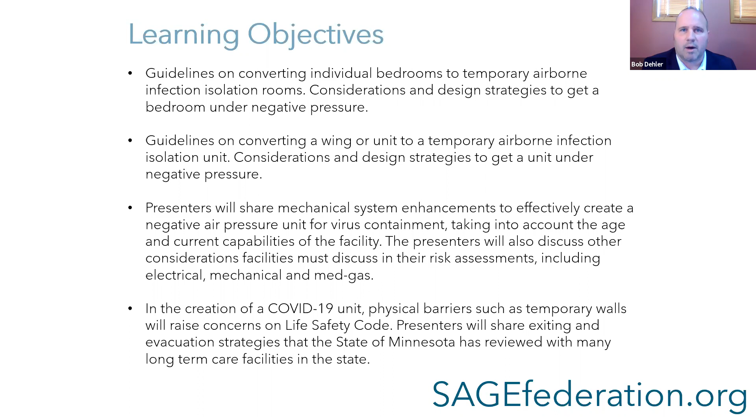And then the last thing we'll talk about is creating a wall to make a temporary unit. A lot of times we want to use existing walls and doors, but many times that doesn't work out as well. And so there are walls that are built to create those units. We'll dive into that a little bit and talk about some of the pitfalls and some of the things to think about when you're doing that.

So first off, I guess what I'll say is that everything I'm telling you today is for the state of Minnesota. It's what we've done. To be honest with you, when all this started, I tried to go to other states to figure out what they've done so I could borrow what they've done. And I had a hard time finding some documentation. So after we had a few conversations with facilities, we documented those conversations and some of the things we talked about. And really that's what we're going to be talking about today.

So please, if you are from another state other than Minnesota, find the Bob in your state and make sure you're in communication with that person. But not only that, there are so many authorities having jurisdiction that you have to work with. Remember to include them all, the health department, but in particular your fire marshal. Sometimes it's a state, sometimes it's local. There's building code officials. Sometimes you have to bring your insurance in when you start talking life safety code and other requirements. You just want to make sure you have all the right people, you're communicating with all the right people. And again, we're going to be talking a lot about risk assessments.

What we're talking about today is all individual. So you need to really assemble a really strong team to go through these risk assessments. The teams would include your infection preventionist, your facilities personnel, clinical, the nurses, leadership, and for sure your engineers.

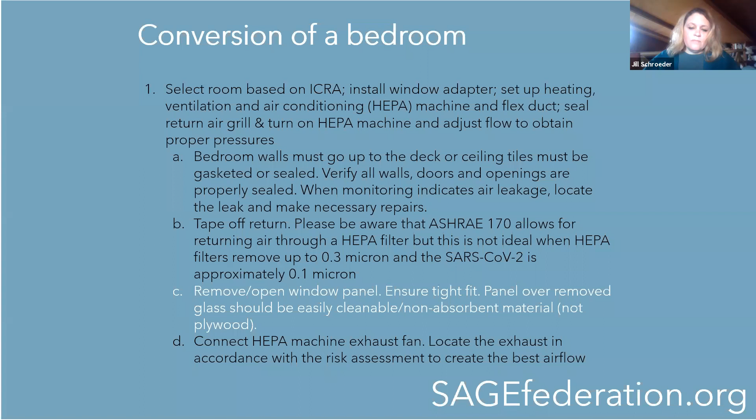So first off, you want to take out the window to the bedroom and put in a panel, making sure you get a nice tight fit. But make sure the panel you put in is not plywood. Everybody wants to use plywood, but not plywood. First off, if your state or local fire marshal sees plywood in the room, they will probably get a little bit excited, so combustibility wise, it's not the best idea. Also, cleanability-wise, your infection preventionists will say plywood is not a good idea.

So don't use plywood. If you're looking for something, you can talk with your glass supplier—they generally have panels made of metal, little sandwich panels that you could use.

Connect your HEPA machine to your exhaust fan and make sure you locate the exhaust in accordance with your risk assessment for the best airflow.

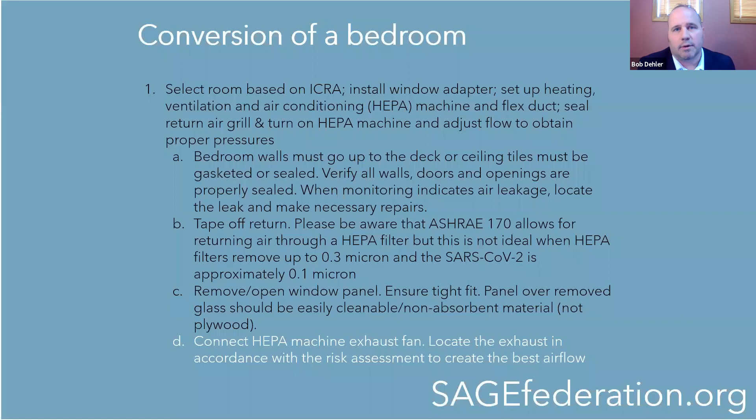We also recommend that you plug in your HEPA machine to emergency power, so if the power does go out and something else bad happens, you really need that pressure maintained in that room—it's super important. We also recommend that you maintain the pressure in the room to at least 0.01 inches water gauge in relation to the air pressure in the corridor. Again, we pulled this from the AII room requirement. It's not very much, but it's very, very important to maintain that negative pressure.

You want to monitor those air pressures periodically to make sure that you're maintaining that air pressure. You can do this with audible electric devices, manometers, or smoke tubes. You can do a lot of different things, but make sure you're doing that in accordance with your facility plan or your emergency plan. Sometimes people want to know how many times they have to do it - well, what does your emergency plan say? Does it say you have to do it every day before people go in and out? So just make sure you stick with your plan on the time frame.

We also say consider maximizing the exhaust fan in the toilet room. If you can get a few more CFM out of the toilet room, see if you have some variable drives on there where you can turn that up. And if your exhaust is not dedicated, as part of your risk assessments, you should look to see if you need to do anything else.

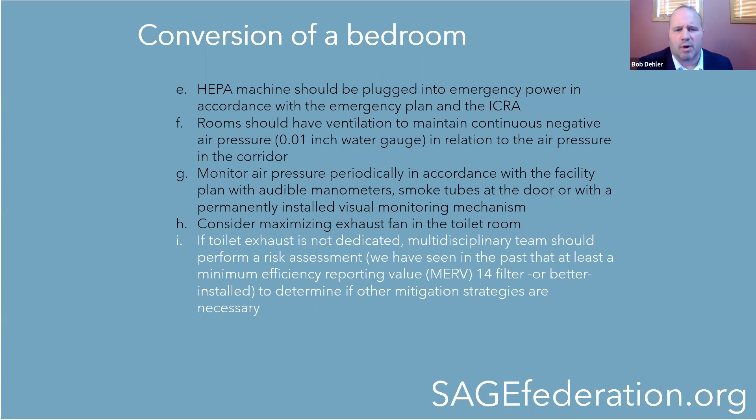We've had a number of facilities decide that they wanted to put a MERV 14 filter. I'm not even sure exactly how they attached it, but I had a feeling they were just somehow attaching it to the ceiling in the toilet room. They wanted that extra level of protection. So if your infection preventionist says, I don't know if I want this air being exhausted, because you never know what'll happen with the system if it goes directly out, or maybe if something gets short circuited, it could pull somewhere else. So a lot of facilities we've talked with have been putting some sort of MERV 14 or better at the exhaust.

Now you've got the HEPA machine sitting in the room and the exhaust going out the window. You want to make sure that exhaust terminal in that window is at least 10 feet away from anything - air intakes, operable windows, sidewalks, patios, anything accessible to anybody. Even though it is filtered through the HEPA machine, you want to be careful and have that clear at least 10 feet.

The door to the room - again, it's super important that these rooms stay under negative pressure, so maintaining that pressure is very important. Keeping that door closed is one of the main ways that you do that. So we would say consider installing a closer. Many facilities aren't doing that right now, but they do have it spelled out in their policies and procedures that the door is always closed at all times, so that pressure is maintained.

And if you don't have a pressure monitoring device, we're recommending that you install something - whether it's a smoke test, air strips, or an actual electronic manometer that'll monitor it constantly.

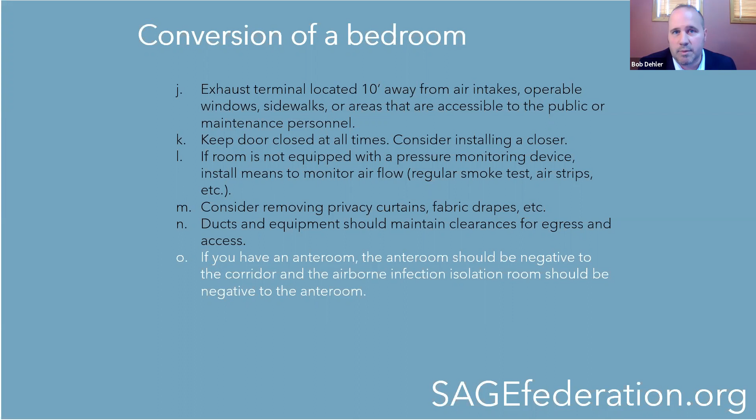And last but not least, for the conversion of a bedroom, if you have an anteroom, some places are thinking about putting in anterooms. There are many ways you can do this. This is why you hire a really smart engineer like Scott to help you out. But if you do want to have an anteroom, we'd recommend the anteroom be negative to the corridor, but the patient room would be negative to the anteroom. So the most negative would be the patient room, the next negative would be the anteroom, and then you would have the corridor.

So the next question we always get is, okay, once we get three rooms like that, it might just be easier to convert a wing or a unit into COVID. And once you start installing all these HEPA machines, if you can find them now, it might be easier to consider a wing. So if you are considering a wing, make sure you're running your infection control risk assessment, and all the other risk assessments that are necessary. Really the same ideas we discussed on the individual rooms apply to the unit.

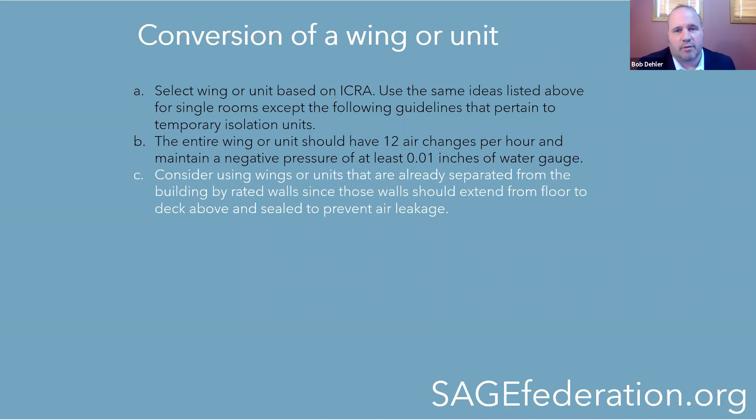So again, 12 air changes an hour and maintaining a negative pressure of 0.01 inches water gauge. The most important thing with the air pressures is a lot of times people will talk with me about, well, we can't get 12 air changes, but what do we really have to do? Again, the 12 air changes and the pressure were recommendations pulled from ASHRAE 170 for airborne infection isolation rooms. So to me, the most important thing is that you're maintaining that negative pressure. If you can only get 10 air changes or 8 air changes, but you can maintain that negative pressure, to me, that's the most important thing.

So if that's the case, then it would just show up on your risk assessments that yes, you may not be making the 12 air changes, but taking into consideration what your infection preventionist says, and if people in your facility believe you're okay with something that doesn't quite meet our guidelines, to me this is a facility decision and facility mitigation.

So you should check all the walls around the whole unit. So in the bedroom, when we used the one bedroom, we checked all those walls to make sure they went up to deck. You're going to want to do the same thing for this whole unit. Having these walls go up to deck is really of utmost importance. Without that, you're going to have an almost impossible time maintaining that negative pressure. So make sure the first thing you do when converting a wing or unit is to make sure those walls go to deck, and seal all those penetrations as well.

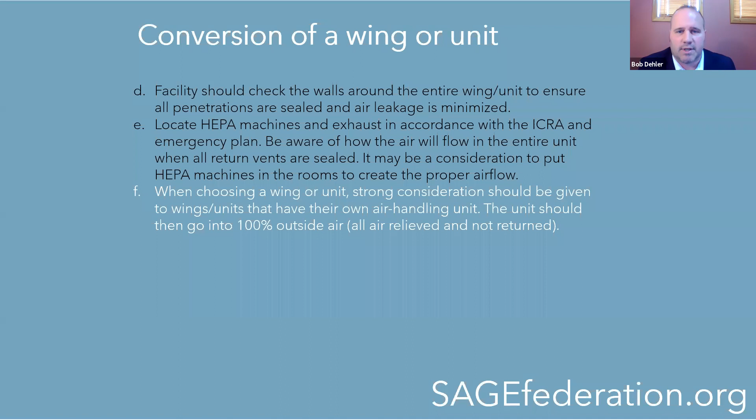You want to think about where you want to put these HEPA machines. I've seen some facilities just keep them at the end of their quote unquote corridor at the end of the unit and exhaust them out there. Sometimes they'll use a few rooms at the end, but basically they're putting a negative pressure in the entire unit. So again, make sure that goes through your risk assessments and you really understand how that air flows.

I should add here, Bob, that we did not state at the beginning, and we should have, that COVID-19, they're still learning a lot about this virus, but we're treating these guidelines as a blanket guideline for an infectious airborne disease unit. We know that right now, as of today, COVID-19 is not identified as an airborne infectious disease, but we're treating it as if it were because we don't know enough about it.

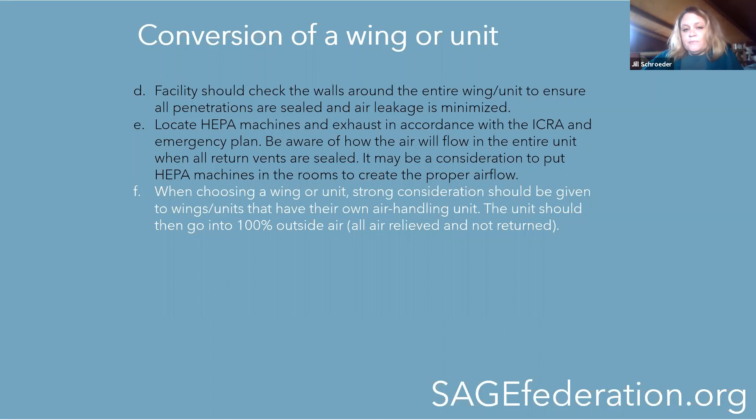Yes, the CDC does not recommend having the negative pressure like we are today, but people have also gotten COVID-19 15 to 20 feet away from other folks. So there's people on both sides of the aisle. We're taking the more conservative route. Right.

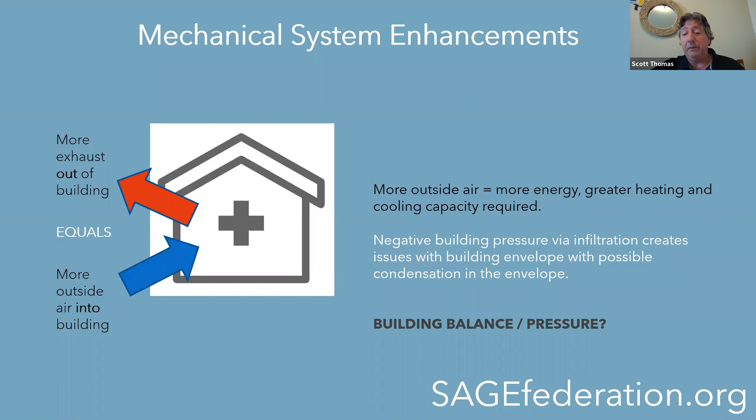With our mechanical systems, once you start taking all this exhaust air out of the building, it means we're going to need to introduce more outside air into the building, which means more energy, greater heating and cooling capacities required potentially. If you have a negative building, if you don't address the increased outside air being introduced through an air handling type system—assuming you go with a wing, or if you have numerous rooms—it could create a negative building pressure, creating infiltration issues and potentially condensation issues in the envelope. So that's the biggest thing to look at.

We put a list together here for assessment considerations for MEP systems. This applies to both the entire wing or just individual rooms.

Are you planning for this to be a temporary or permanent fix? Obviously it's probably very urgent to get this done, so maybe you start with a temporary solution with a plan to develop a permanent resolution.

With these exhaust units, the HEPA units, with AII type rooms, if you're trying to use existing systems, it'll increase the static pressure of the systems due to the increased filtration static pressure drops. So that needs to be considered with entire systems in a wing type application.

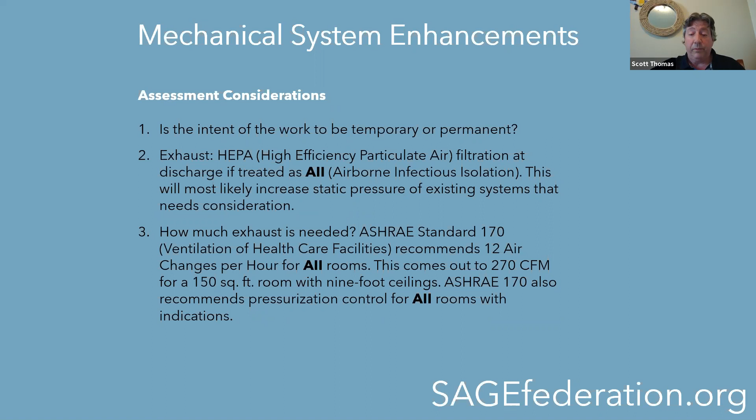As Bob talked about, 12 air changes per hour is recommended for AII rooms. For an individual room, assuming 150 square feet with 9-foot ceilings, that comes out to 270 CFM, which isn't really that bad as far as a window unit. I think the smallest units start out about 500 CFM, which are real common. We'll show a picture of a typical unit later on.

So say you're doing a wing and you have a DOAS unit, a dedicated outside air system. It's either a heat wheel type unit or a plate and frame type system. With heat wheel units, there is cross contamination, so you're going to need to divert that exhaust air in some way, possibly adding an exhaust fan to separate it out.

As Bob said, if you have a dedicated system, you can't just take 3 rooms and tie it into the bigger system. You need to look at what this unit serves—does it just serve the wing, or more than the wing? If it serves more, you need to separate that out. Plate and frame type heat exchangers shouldn't have cross contamination issues, but check with the manufacturer, get test data, make sure you won't have issues down the road.

So talking about the wings, Bob mentioned removing a window. Well, you put a mobile air cleaner, a MAC, in the room. Maybe it's easier to go out the wall—you can just run a round or flex duct through the wall, and if you have stud wall construction, that's probably simpler, works easier, and is less costly with less overall impact.

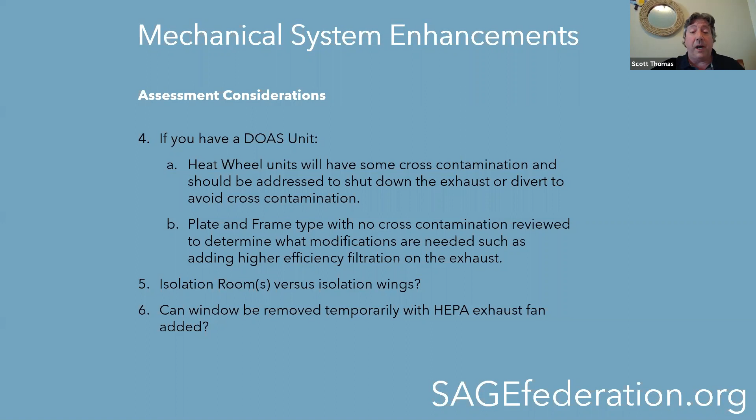What's your building balance, and how does that affect your heating capacity? Normally the FGI guidelines and state of Minnesota code require redundant heating capacity, so you're probably going to be okay with the heating aspects. In this type of situation, you need to tap into that spare boiler—commonly we'll design systems with 3 boilers total with 1 standby unit, so you've got quite a bit of capacity there.

Cooling—well, if it's a northern climate, it may not be that big of an issue. With the elderly you have to be careful, but it's not like you'll be without cooling completely. Obviously cooling capacity is a lot more critical in your southern climates.

Bob also mentioned emergency power capability—ASHRAE and FGI both recommend AII rooms be on emergency power, so it's almost beyond a recommendation at that point. And if you're doing a wing, look at your fire alarm and fire protection systems, and your lighting systems. Where does that wall fall, and what kind of impacts will that have on those systems?

Another architectural client called me about this, noticed I was on the list, and sent this over. This is a really good example project in New York City where they converted a hospital wing for COVID. It's a little different with long-term care, but there are some good lessons to be learned there. Yeah, it's similar, it's useful. I guess it's all just about sharing knowledge—all information that can be shared is what we're all after.

Is this... so here's the unit, Scott?

What you see on the left side there is the exhaust duct connection. You do a hard duct to it or flex connection. And for the 500 CFM unit, you're looking at a 2 foot by 2 foot on the intake air. And I think the unit's about 30 inches, 3 feet long right in there.

And you've got the removable piece on the top there with some bolts to change for the filters. And you'll have a pre-filter and a final filter. Your pre-filter is a less expensive filter, and the final is your HEPA type filter, which you change the pre-filters more often.

And then you can kind of get into this control thing too. You know, these fans are ECM motors, so it's real easy to vary the speed. So if you want to get sophisticated with the controls and automatically control the unit, it makes a lot of sense. You know, like Bob said, the minimum is 0.01 inches of static, which is hardly anything.

So typically you want to set it up when you do your setup. Let's say start it out at about 0.05 or 0.03 inches, and it gives you some flexibility for loading of the filter, because as that filter gets loaded, if you're not changing the speed on the fan, you're going to get less airflow, and then it's going to be less negative pressure. So it's just some general things to think about.

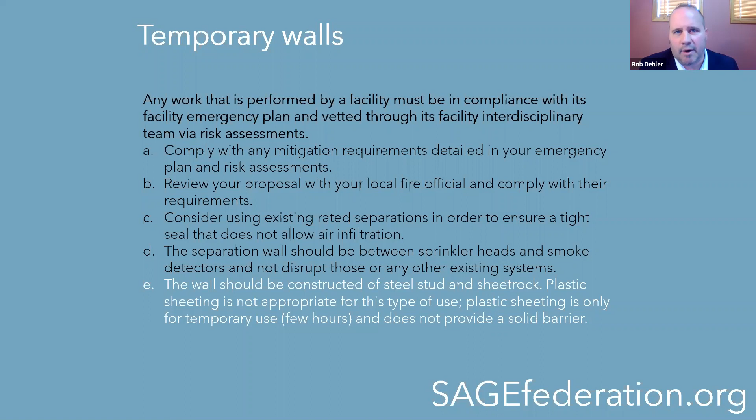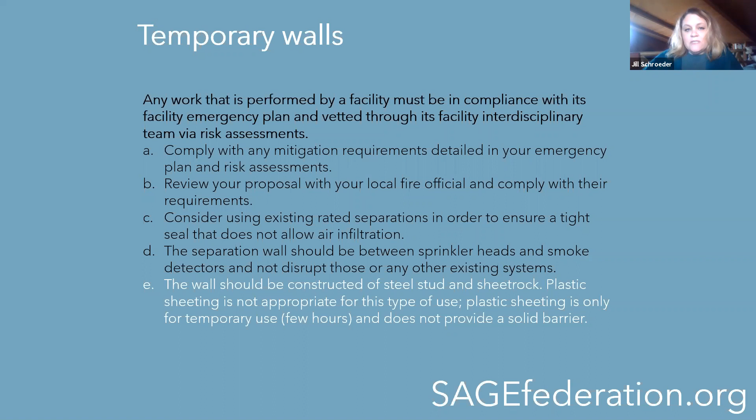Temporary definitely means temporary, not only for infection prevention's sake, Bob, but we've also talked about fear. We're trying to calm fears. If you are a resident that has not been affected by COVID and you are adjacent to this space that is now going to be called the COVID unit, you do not want to approach an area that's just sheeted off with plastic. It's simply not going to give you a sense of security and a state of mind that you're going to want to be in. Yes, that is correct. Let's go to the next one, Bob.

So when you build that wall, you want to make sure that it's sealed tightly to the walls, because you're going to make that unit behind it probably negative pressure. So you want to make sure it's sealed pretty well tight to the walls, floors, and the ceiling.

Now, the issue you're going to have with these temporary walls is, do you build the wall to the deck above or just to the drop ceiling? That's something you really have to work through in your risk assessments, because you really should go to the deck above, since you want to maintain those pressures and maintain that seal. If you've got a drop ceiling on the other side, you're going to have a hard time maintaining those pressures and that seal. So you've got to think really long and hard about where these walls are and how they're constructed.

Door size. We had a facility come talk to us, and they had this plan to put up this temporary wall. Everything sounded great, but they were putting in a 30-inch door because that's one they had in their basement. We said, well, when you start looking at everything for egress and life safety code in these COVID units, generally if there's an emergency, you're not moving them to the other side of the smoke barrier. You'll probably be rearranging your emergency procedures. So how are you moving people? Do you need a double egress door? For the most part, it's not necessarily required.